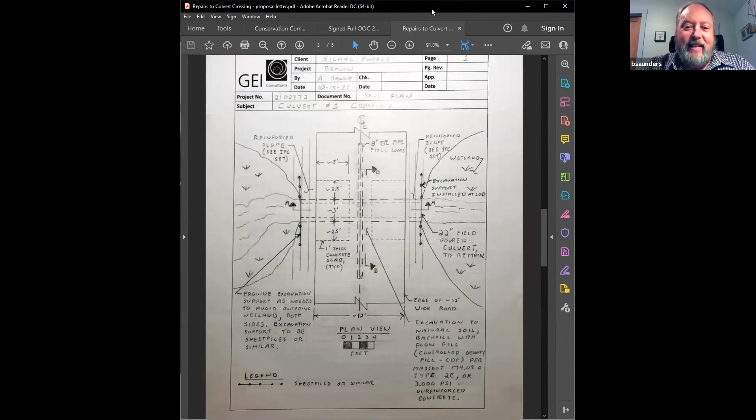And then are there any photographs of this as well, of the existing condition? The only photograph that I had was really of just a hole. A hole in the ground, hole in the pipe? A hole in the surface of the road. You may be able to see it, I don't know if it's the full extent of it in some of the pictures I took from the pre-construction site visit.

When was that again, Cassie? Sometime in September, maybe. It was on the 16th of September.

I'm pulling it up now if you want me to try to see. Okay, that would be helpful, thank you. Yeah, okay, here's one I can share. I'm going to stop this share, hold on. This is the crossing, where is it in relation to this? I mean, it's right either, maybe probably a little more to the right here. Yeah.

So when was the silt fence installed? And relative to this, I'm assuming the erosion occurred - when did the erosion occur relative to the silt fence installation? They installed the silt fence like that? Well, that's the way it was at the time of the site inspection or the pre-construction work. I don't know whether that erosion had occurred before the fence got installed. I know the fence was only installed a couple of weeks before that inspection.

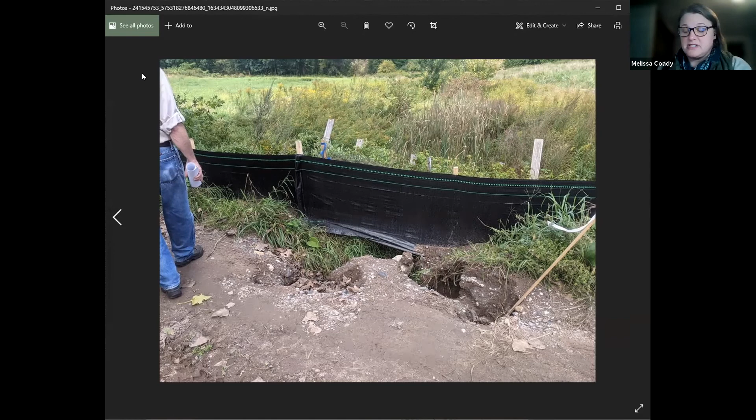My concern is that section of erosion control barrier is in no way effective as it appeared in this photo. I would agree, they haven't started any construction out there. True, but we shouldn't, it's a separate issue, but really at this location, if they'd started construction the next day, this would not have been adequately effective.

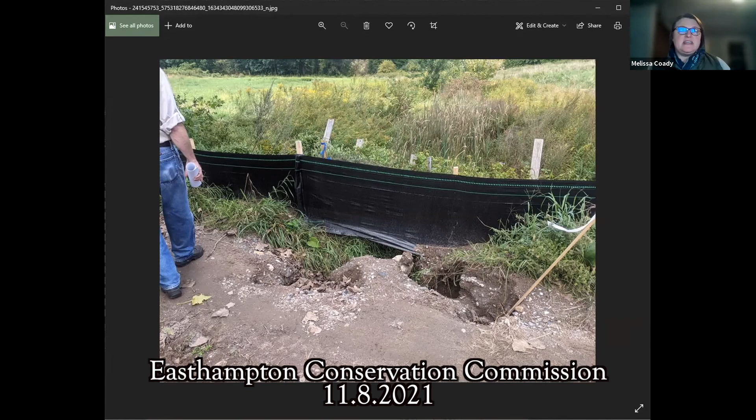And then you mentioned there's a water main potentially. Is it not within an existing easement that would have shown up on the site drawings? That's right, it didn't show up on the drawings. There is an access easement through there for emergency access to the Lathrop community, some sort of separate emergency-only access easement, but there's no easement we saw for a water main.

And Cassie, is that a municipal water main, or is that an agreement between Lathrop and Mr. Gall as the property owner of this land? I haven't heard of this instance before, I'm assuming when Mr. Saunders heard of it, but my guess is that if it's between Lathrop and on Mr. Gall's property, potentially it's not municipal, but I'm not sure. I don't know.

I asked Andy if there was any input from the town on this. It was my understanding that the town's maps don't show it. Yeah, I talked to the contractor about it, and he had called the town engineer, because we had heard through the property owner that the water main existed through there. So the town engineer did come out, and he mentioned that's the one section of town they don't really have any records on the water main, so it's almost like a file was missing or something. So that's secondhand through the contractor.

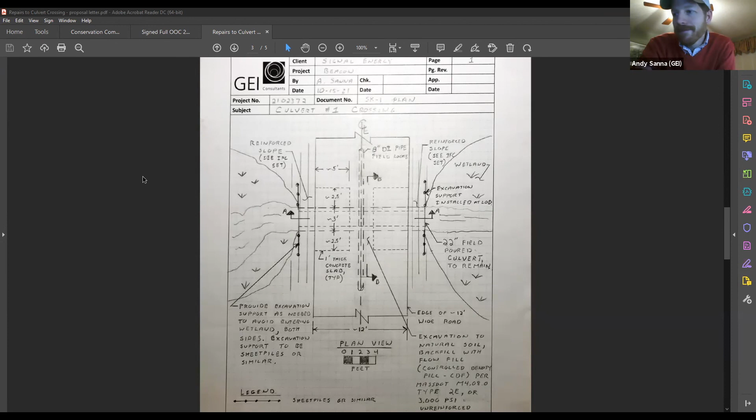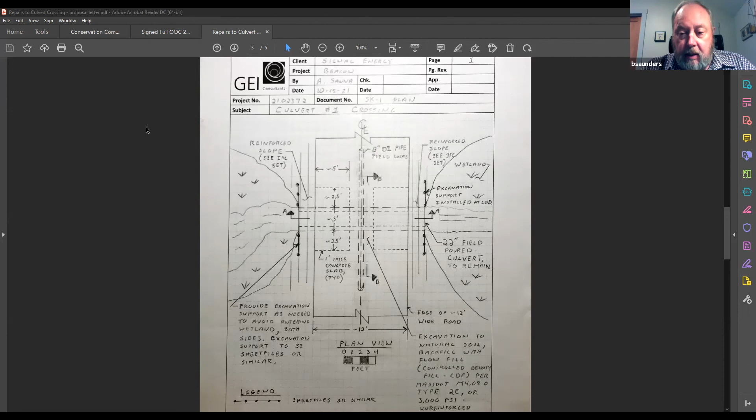So if I understand correctly, these proposed measures are within the footprint of the existing gravel road, within the erosion and sedimentation control barriers, but they're within the limit of disturbance line that's in the plans of record. Cassie, can you share the final approved plan of record view of this location? Yep, hold on just a second. Thank you.

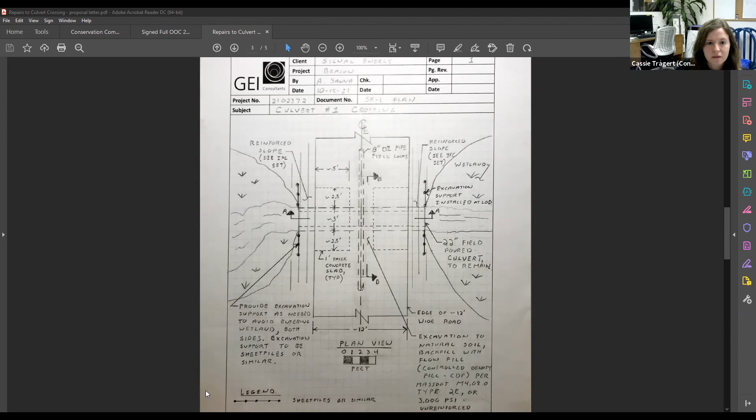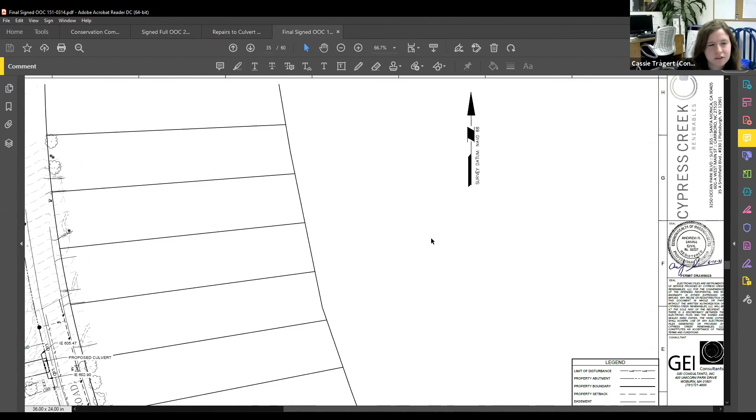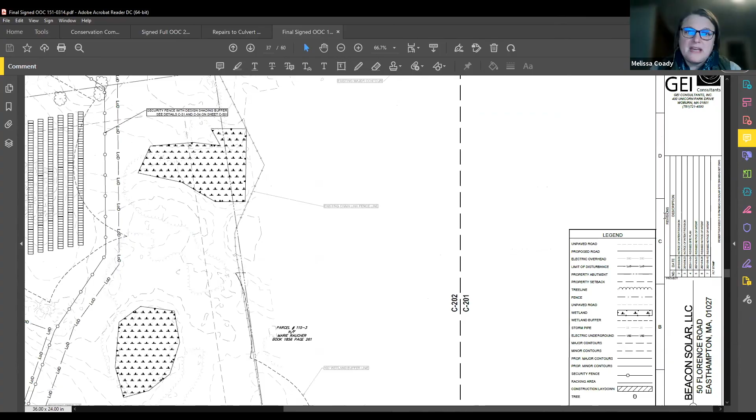Okay, existing conditions, overall site. Oh, you almost had it. Is there a closer one? No, go further up. Okay, right there. I just thought maybe we should go to CX01, yes, just to get it closer.

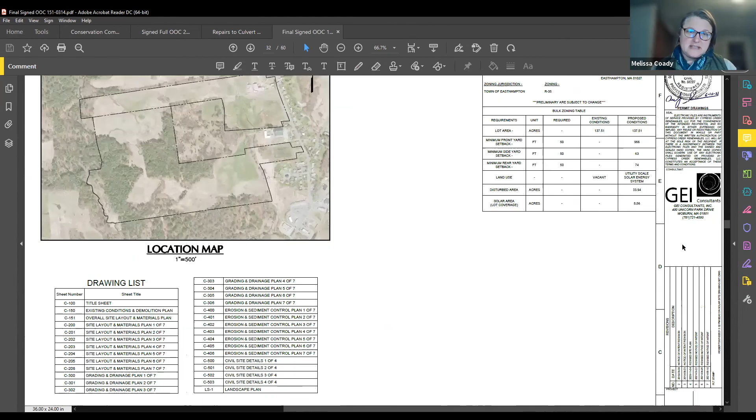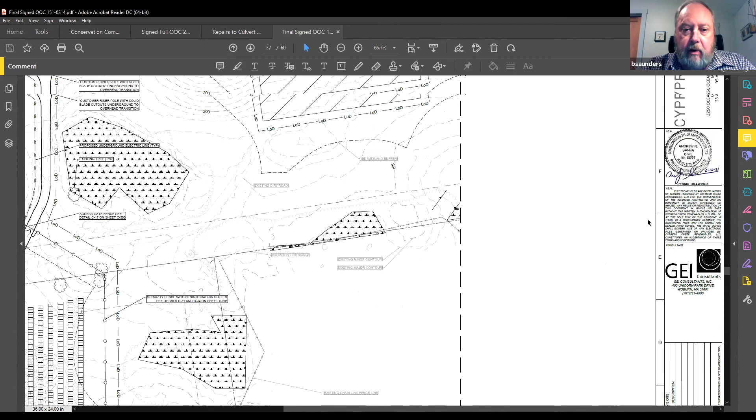Has there been an assessment of the other culverts since this observation? Well, we have walked along the road for the other culverts. This is the only one where there was actually fill involved for the crossing. The other culverts are relatively at grade, so they don't have the same situation as this one.

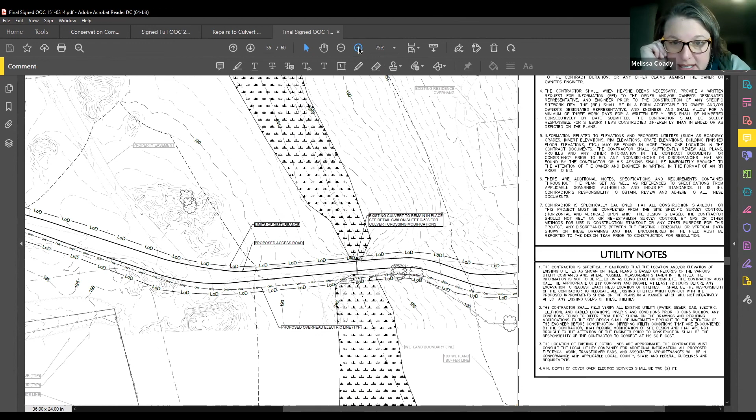Is that it right there, Cassie? That's it, that's it, sorry if I wait. Apologies, Cassie, but do you see the callout there that says existing culvert to remain in place? See detail C56 on sheet C503. Okay, let's do that, can we go there? Yeah, thank you.

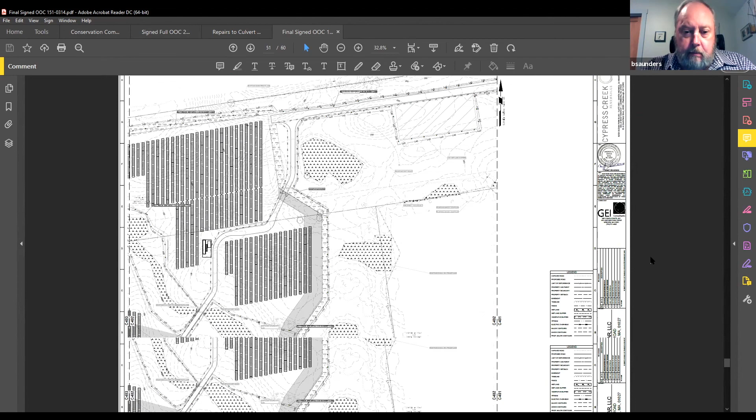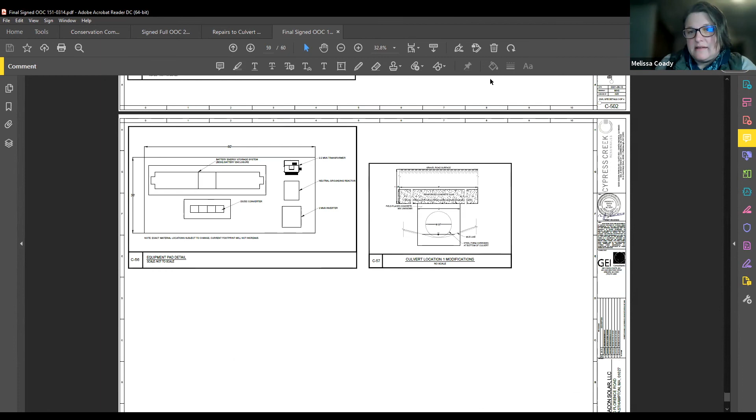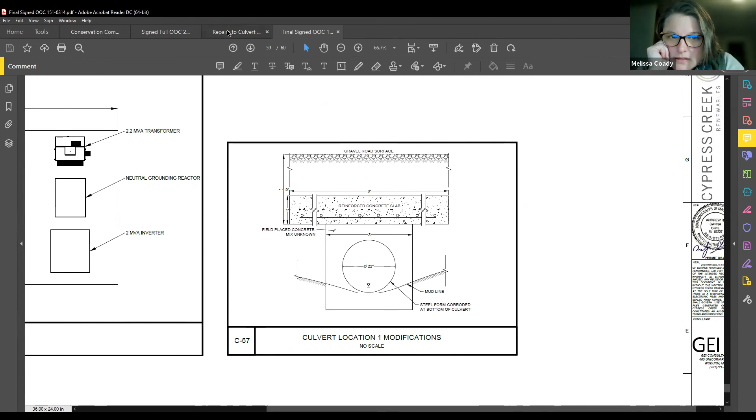Oh, C56 on sheet C503, I believe. One more. Right there, culvert location 1. Can you zoom into that detail? Can you toggle over to the proposed repairs? Yes, there should be a section if you go to, yeah, one more.

Was there any assessment of what may have caused or exacerbated this condition at this culvert crossing? I don't believe so, Andy. No, there were a couple of large storms that occurred with the hurricane, and I think there was another one that's part of the timing of when the erosion may have occurred. Other than that, there could be piping along the outside of the culvert that may be causing something, but the contractor at this point doesn't want to excavate down without knowing what he's going to get into. So we haven't really researched it, we've just been able to look to see what's going on.

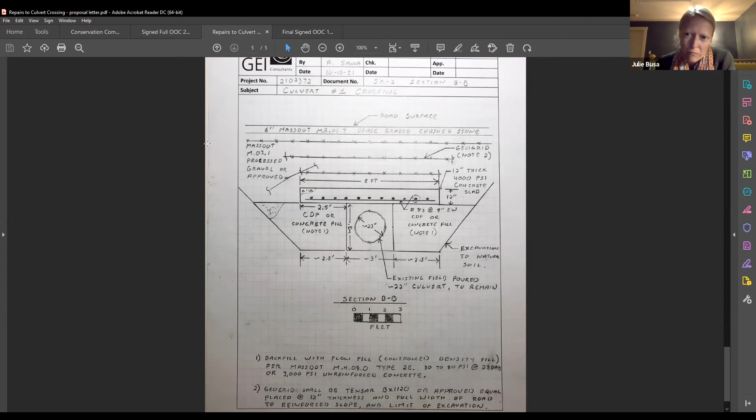Well, I can say that we wanted to keep that culvert exactly as it was. There were concerns expressed during the original public hearings by abutters downstream about potential flooding that could occur. So we did not want to change any of the hydraulics of the streams, including the size and location of that culvert, which is actually at the head of the stream that goes down towards that Maxine Circle area.

And so what we were able to do was propose putting a relieving slab across. And what we have found now is that there are some voids that have formed underneath in the soil. So we're going to need to essentially fill those voids before we can put the relieving slab on.

I understand that, but what I think is happening is that we said at the beginning that we were not fully convinced that this crossing wasn't going to need replaced. You told us that it wasn't. And now what we're seeing is that it does in fact need upgraded in order to do the work that you want to do. Well, we don't think it needs to be replaced at all.

And yet it won't hold up the traffic going over it. Well, of course it will. The relieving slab absolutely will. It's on either side where some voids have formed that we need to take care of.

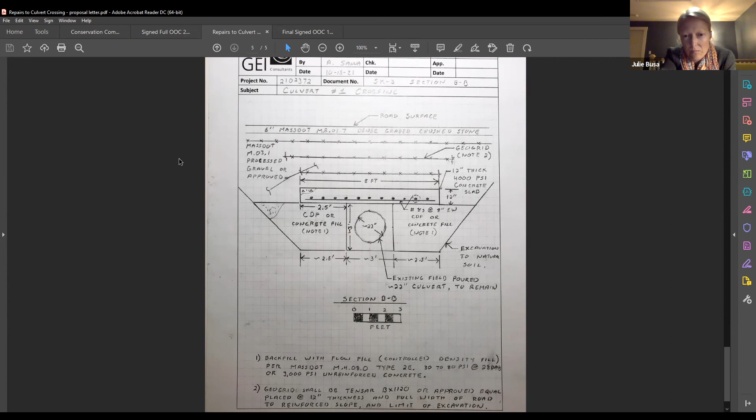I'm not comfortable with this as a minor modification. At a minimum, I'd like to suggest that the commission take time to review the proposed measures outside of this hearing, individually, and regroup at our next meeting, because this is far more extensive than what was originally proposed, and does seem to be encapsulating the existing hydraulic conveyance in essentially a boxier but additional hydraulic conveyance.

And as Commissioner Busa mentioned, the concern, as we understood it, I believe initially the slab was to dissipate ground pressure, spread ground pressure as opposed on the crossing itself, as opposed to concerns about the hydraulic capacity. And this seems to be a lot of work at this location compared to what was originally proposed and approved.

Do any other commission members present have any comments at this time?

Cassie, that photo you had was from September. That's the last, you haven't been out there and looked at this since then? No, I haven't been out there since then. Right. It was September 16th. Right.

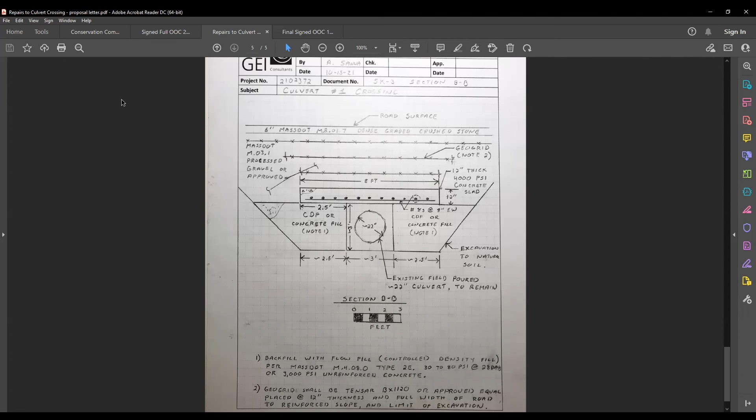Commissioner Ryan, do you have any thoughts to share on the matter? No, I guess I'd like to look at the site as it is currently at some point before the next meeting, that's all.

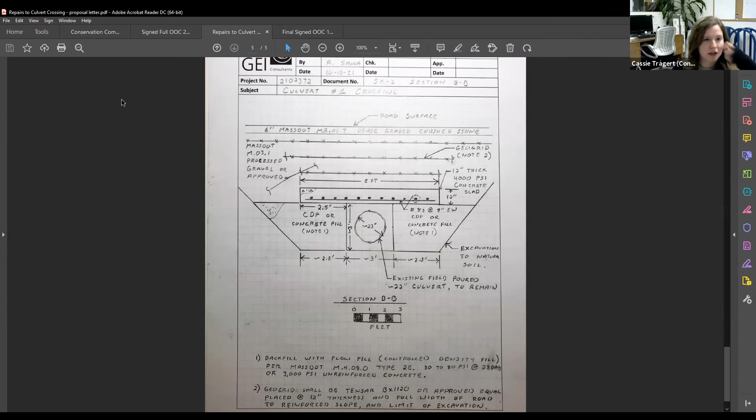Cassie, can you schedule a site visit so the commission has the opportunity to view this with the proposed measures in hand? Yeah, I can do that. I can reach out to you, Brad, later, and we can organize it if that works for you. That's fine.

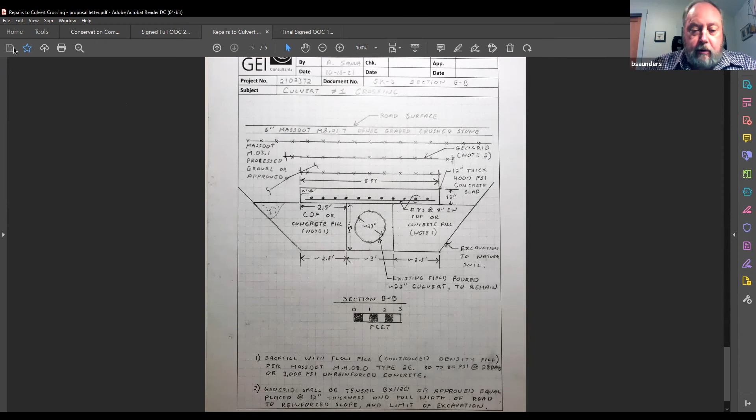All right, thank you. So the commission will table this matter until our next meeting. Okay, and when would the next meeting be? November 22nd at 6 p.m. Okay, thank you. Thank you for listening to us. Appreciate it, have a good night. Good night. All right, returning to agenda order, Cassie?

Yeah. All right, are there any updates on enforcement actions? Yeah, so something we talked about at the last meeting was that at 10 O'Neill Street, Complete Automotive, there was an issue with repeated instances of parking within the area of concern where the violation had occurred. I've uploaded pictures of those instances from September and October.

Throughout September and October is when those were seen, just parking different vehicles at different times, switching them out. Generally it seems like they're probably using the area again to at least temporarily park cars. They're not storing vehicles there, but people who show up and don't have room are parking it there. It seems like it changes every day, so it seems like the matter is not going to resolve itself.

So I think we need to resume efforts to coordinate with this property owner, business owner. Really it's the property owner. The business owner, if they're a tenant and not the property owner, it's incumbent upon the property owner to maintain compliance with the regulations. If they want to propose to the commission a change in use of this area to overflow parking, then I think that's potentially worth pursuing as a matter of course, and the commission may want to consider appropriate mitigation or stormwater management.

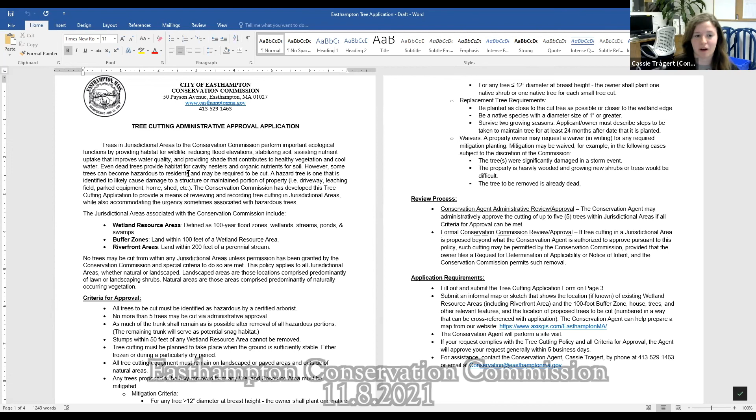It's definitely not supposed to be, we're just trying to see if it's fully in the wetlands or just within the buffer zone of the riverfront area. A big part of it, in my opinion, is if something's at the top of a slope, maybe we shouldn't do this because it's at the top of a slope and we need to keep it stable, things like that. I don't know, I'll definitely ask around and see what other people are doing.

One other question I wanted to pose is whether it's a given, or if we need to spell it out, that 5 approved today doesn't mean you can also have 5 approved next week or next month. Right, that's a good point.

Yeah, what would be a way to do it? We could say you can only do one within a 5-year period, because I'd certainly be keeping a record of all of it. That's the other bonus of it, is kind of keeping a record. So we could see how many had also gone through within a year's period. But I don't know what is a good time frame to say no more than X amount in a year. It might also be good to have a line that says the conservation agent always has the authority to kick it to the Conservation Commission if not comfortable approving something, and that covers it. If it feels like someone's abusing it, you just kick it up. That's right, that makes sense. Cool, I like that.

Anything else that we're missing? I think it'll change a good amount. Oh, do you have something, Deb? Yeah, Jay had said something about it could be a little costly to do certain things.